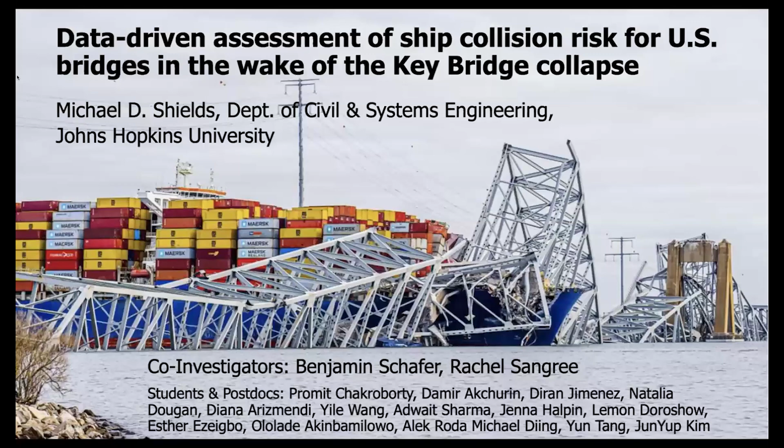But what I want to do is start by taking you back to that day. If I can get this to work, I am going to play the video. You're going to see it here, and I'm going to run through a really quick timeline of the events that transpired that night. So at 1:25 in the morning, the main electrical breaker in the MV Dali tripped. At that time, the ship was three ship lengths away from the bridge. To give you a perspective, that ship's 1,000 feet long, so it was about 2/3 of a mile away.

When it lost power, it lost the main propulsion system entirely. The propellers shut down, the rudder was immovable, and about a minute later, 1:26, the pilots called for a tug assist to come and try to gain control. That tug assist was too far away. About a minute later at 1:27, they dropped anchor to try to slow down as much as they could. And the pilot made a radio call to warn the traffic in the area.

And now here you can see we're sitting at 1:27, about halfway through, almost to 1:28. And you can still see traffic going over the bridge. You can see little cars here still passing over the bridge. At 1:27:53, so at this moment here, the MDTA closed the bridge. So the bridge closed at just before 1:28.

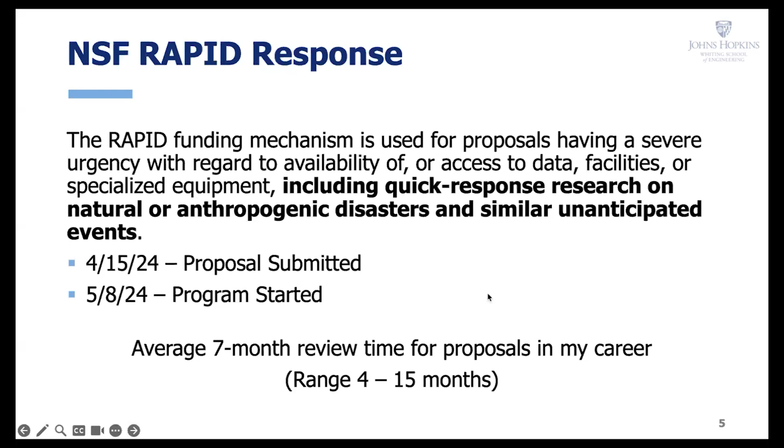Now, to give some perspective, if you're not familiar with NSF, probably many of you are, but to give you some perspective, in my career, NSF proposals, there's an average of a 7-month review time, and the range is between 4 and 15 months. So to submit a proposal and have funding within about 3 weeks is really, really fast for the National Science Foundation.

All right, so what's the basis of our study? Really what we wanted to look at was risk to bridges across the United States. So what is the risk of this specific event happening? But more broadly, what is the risk that another event like this could happen somewhere in the United States?

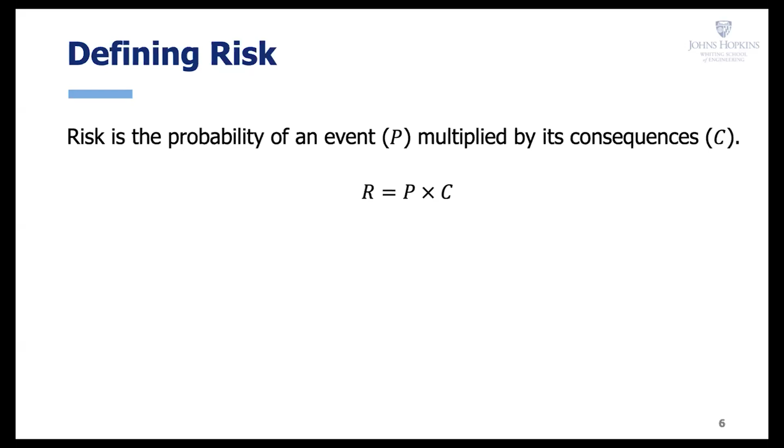So I want to start, I'm going to keep things as simple as I possibly can. I'm going to start with a really easy definition of risk, right? Risk is the probability of an event multiplied by the consequences of that event. So if we have an event that is really catastrophic, like a bridge collapse, we want the probability to be very small. Our risk tolerance is the risk that we're willing to accept. At what level of risk do we as a society, do we as individuals, are we willing to accept?

Now, the established risk tolerance for bridges in the United States is that the annual frequency of collapse due to a vessel collision for critical bridges like the Key Bridge should be 1 in 10,000, okay? So what that translates into is, you can think of that as being a collapse event every 10,000 years. You want this to be exceedingly rare, okay?

So when this occurred, and I got that email from my colleague, it really called into question, are we actually achieving this risk tolerance? And it also asks the question, if we are achieving this risk tolerance, is this risk tolerance itself adequate? Is it sufficient for what we want it to be?

So this led to 2 hypotheses that we posed in this study. The first hypothesis was that the probability of the bridge collapse was underestimated, and specifically the reason that it was underestimated is because the probability of a major collision was underestimated. And I'll get into sort of the basis for that hypothesis in a moment.

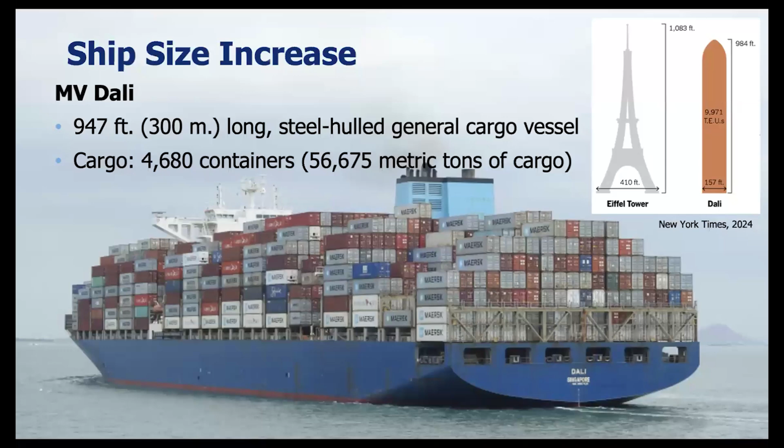So we now see about 3 times as much traffic as we did at the time that the Key Bridge was first built. The other factor is that the ship sizes have increased incredibly. The Dali, which is the ship that collided with the Key Bridge, was close to 1,000 feet long. It was a cargo vessel that held about 4,700 containers, 57,000 metric tons of cargo. To put this in perspective, that's turning the Eiffel Tower on its side, to give you a sense of scale.

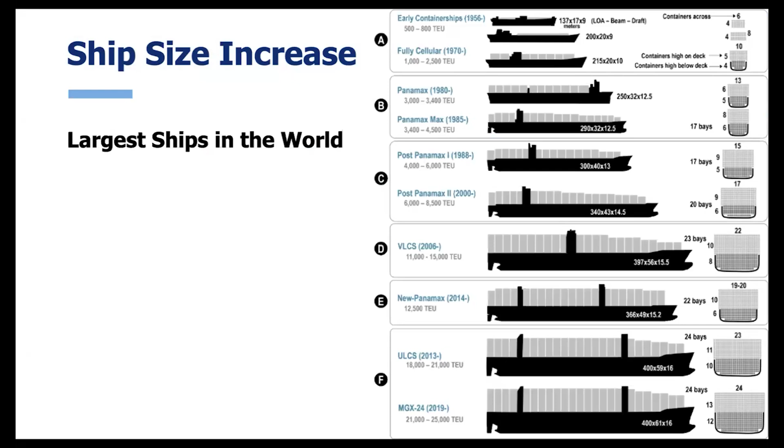And believe it or not, the Dali is a large ship, but it's not by any means the largest ship out there. So if we take a step back in time and we look at what was the largest ship at the time that the Key Bridge was built. The Key Bridge was built in 1977, and the largest ships in the world were about 3,000 TEUs. To give you some perspective, a TEU is a 20-foot equivalent unit, and there are 2 TEUs in a ship container, okay? So the largest ship in the world at the time was about 3,000 TEUs.

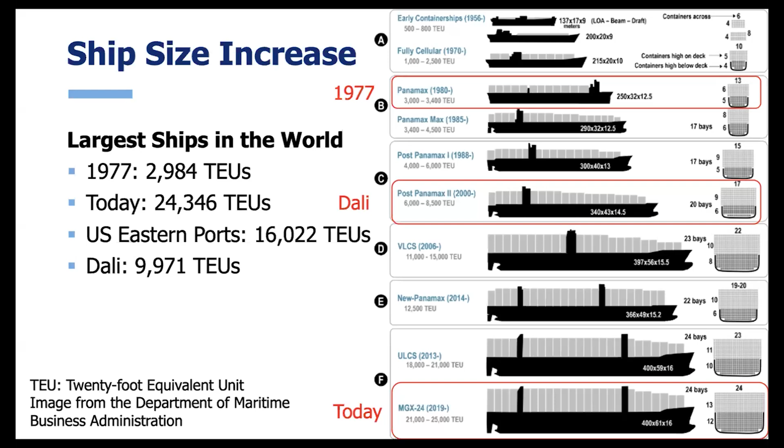Today, the largest ship is 24,000 TEUs. That's 10 times as large as the largest ship at the time the Key Bridge was built. What the ports in the eastern United States can handle are ships up to about 16,000 TEUs. The Dali itself was about 10,000 TEUs. So the Dali, like I said, was a large ship, but it was 2.5 times smaller than the largest ships out there, just to give you some perspective. So now if we think about the Dali being the Eiffel Tower, the largest ship now is the Empire State Building, okay? All right, so now we have a very, very large number of very enormous ships passing

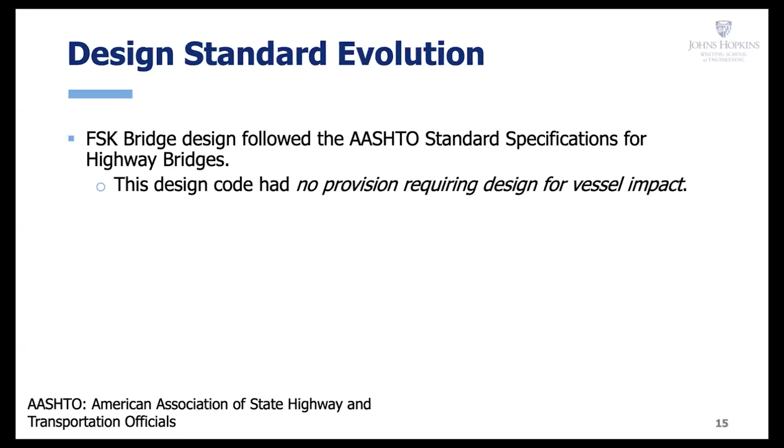through American waters. The other thing we need to look at is how the design standards have evolved over time. Okay, so here, most people are really surprised when they hear this, that when the Key Bridge was built, there was no provision in the design code that required it to account for vessel impact. That started to change in 1980 following the Sunshine Skyway Bridge collapse in Tampa, Florida. In the aftermath of that, people recognized that ships were a real threat to U.S. bridges. However, it took 14 years for the design codes to update and to require vessel collision provisions. So bridges built after 1994 now account for ship collisions, but any bridge that was built before 1994 was not required to adopt these provisions. They were not required to be retrofitted or protected from vessel collision.

So let's go back to our hypothesis. Why do we think that the probability of collision is underestimated? Well, ships are much larger. There's a lot more of them, and the design didn't account for them. So all of these factors together really led us to believe that we majorly underestimated the risk to U.S. bridges. So let's take a closer look at the current design standards. And I want to emphasize that these design standards are, again, just for bridges post 1994. So this was never applied to the Key Bridge.

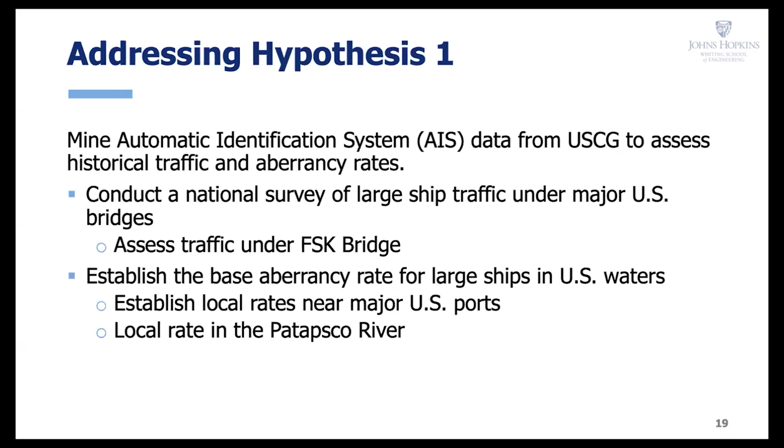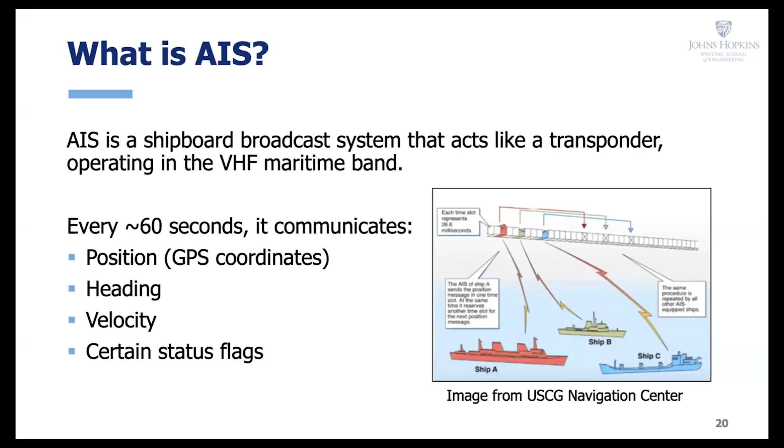And we wanted to use that data to assess historical traffic and aberrancy rates. So we conducted a national survey of large ship traffic under the major U.S. bridges, and that, of course, included the Francis Scott Key Bridge. What we're currently working on now, but is not complete yet, is establishing true aberrancy rates for large ships in U.S. waters. So again, AIS is a transponder system communicating to the U.S. Coast Guard the location of every vessel in American waters.

Now, we took that data all the way back to 2009. So we have data for every ship that has been in American waters since 2009, every minute of their travel. To give you some perspective, looking at just 2018 to present, which is what we're going to focus on, that's about 1.6 terabytes of data, or 160 million broadcast points from all vessels in U.S. waters.

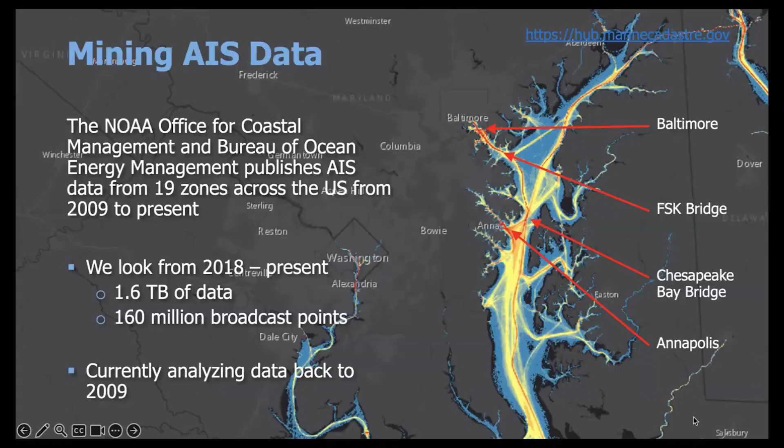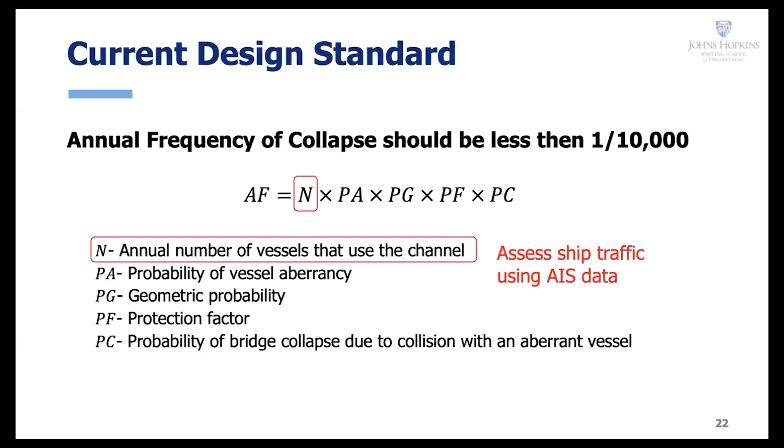Okay, so like I said, we're trying to quantify that N, right? We're trying to use the AIS data to figure out how much traffic is passing under US bridges. So the first thing we needed to do is find where these ships are going. So we identified the 49 busiest ports in the United States. These 49 ports account for just about all of the very large ship traffic. Any port that could handle ships larger than 150 meters is of interest in our study.

And here you can see a geographical layout of some of those major ports. We're looking all across the United States, East Coast to West Coast, Gulf of Mexico, New Orleans, Houston, even some up on Lake Superior in Duluth, Minnesota. So we looked at traffic coming into these ports, and we identified all of the waterways that lead up to these ports.

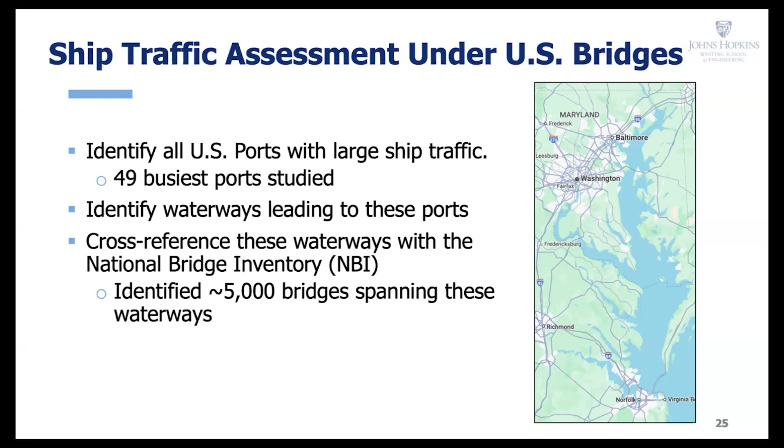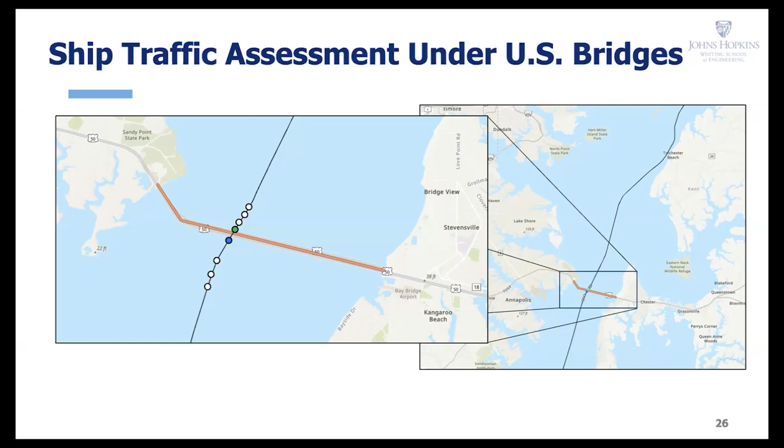And to give you a sense of how we did this, we wanted to cross-reference the AIS data that we pulled from the US Coast Guard with the data in the National Bridge Inventory. Here, I'm going to blow this up, you can see these little dots are AIS data points, and the orange stripe is a line on a map that represents the Chesapeake Bay Bridge as identified in the National Bridge Inventory. What we needed to do is identify every time one of these ship paths intersected with one of the bridges we identified. And so we systematically counted every time a large ship passed under a major bridge in the United States over the last 15 years or so.

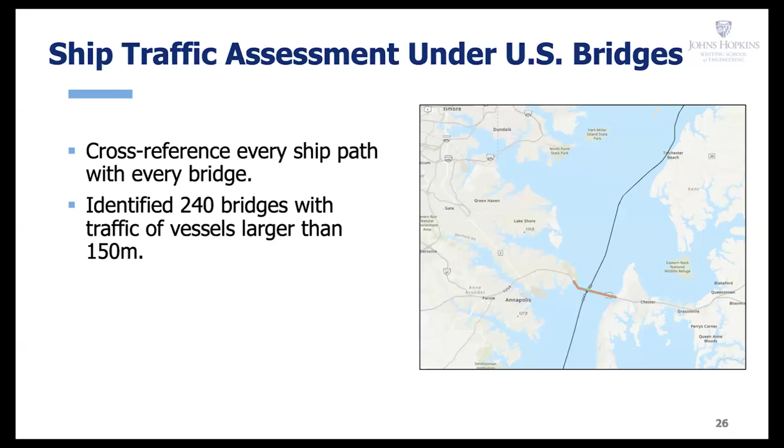From this, I mentioned we had 5,000 bridges that spanned these waterways. We identified 240 bridges that had traffic larger than 150 meters. We have since expanded that. We now have about 400 bridges in the study, and the major conclusions in terms of traffic were broken down

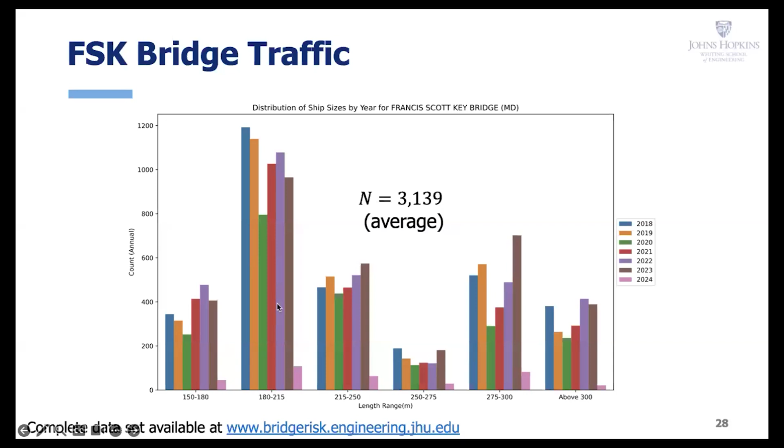So next, focus on the next two components. We know that there's now a lot of traffic. N is large. There's a lot of traffic going under these bridges. And the next components are looking at what is the probability that the vessel actually goes aberrant and then collides with the bridge. And so what we're looking at now is trying to use this AIS data to assess aberrancy.

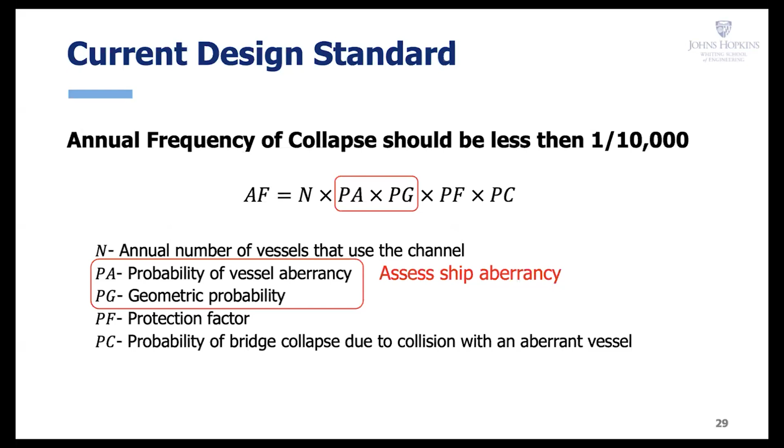What we did in our initial calculations, and that's the results that I'm going to present, because quantifying aberrancy is actually quite difficult because there are a lot of different reasons that a ship can aberrate. It could be pilot error, it could be weather, it could be a loss of propulsion event. And trying to arrive at an aberrancy rate is quite difficult, something we're still working on. But the AASHTO code, the design specification, specifies that there's a base aberrancy rate of 0.6 times 10 to the minus 4. So that gives you a sense of the rate at which the ships go aberrant.

And then it has a number of factors on it. These factors we're going to ignore for the time being. And the reason we're going to ignore them is because all they do is serve to increase this base aberrancy rate, to make these type of events seem more frequent.

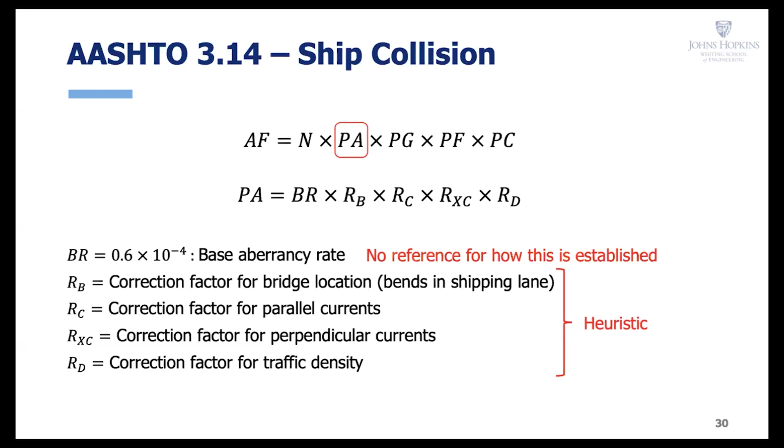Now, I want to emphasize here that there is no reference in the AASHTO code as to how this base aberrancy rate is established. So we're still looking for it. If somehow we find it, we would love to know where this comes from. These other factors are really heuristic, and that's why we're trying to quantify this aberrancy rate for ourselves rather than relying on these sort of heuristic factors.

So now, in terms of the geometric probability, let's talk about a ship that's gone aberrant. What are the chances that it's going to hit the piers of the bridge? So what the code says that we do is, and I'm going to try to explain this graphic as best as I can. If this here is the bridge pier, can you see my cursor?

Okay. If this is the bridge pier, we're going to imagine we place the ship next to it on both sides of the bridge, and we're going to take half of that and project that down onto a normal distribution, where the center of the normal distribution is the path of the ship. And we're going to assume that the aberrancy occurs according to a normal distribution. So there's a high chance that it's going to just aberrate a little bit, but there's a low chance that it might aberrate a great deal.

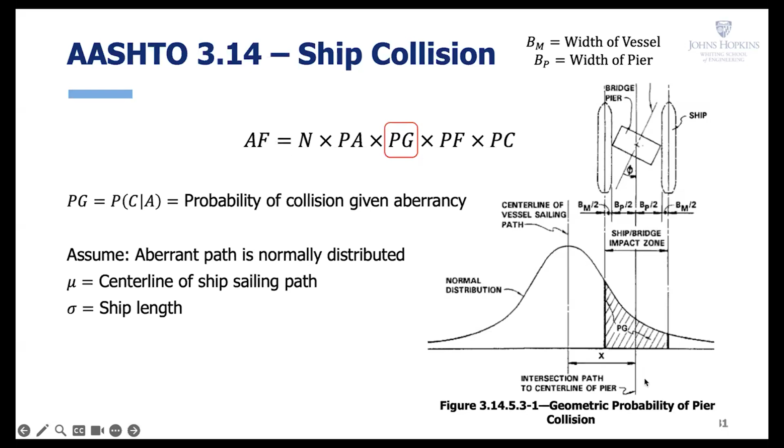And then the intersection of the projection of that down onto this normal distribution, the area under that curve, gives us the probability. And the standard deviation, I forgot to mention, of this normal distribution is equal to the length of the ship. So the longer the ship, the wider this distribution is, and the larger the chances it's going to hit the piers.

Now, there are several problems with this. First of all, the ships oftentimes are not passing right down the center of the shipping lane. If I look at the Golden Gate Bridge as an example, there are actually two dominant lanes that they pass in, and neither one of them is centered under the bridge. Both of them are actually a little bit closer to the piers than the center span.

So if the ship is actually passing somewhere much closer to one of the piers, and then it aberrates, the probability that it's going to collide with the pier is much higher. This is not accounted for in the current standards, and it's something that we're working to improve. So now if I look at the Key Bridge as an example, I'm going to run through a very quick calculation of this.

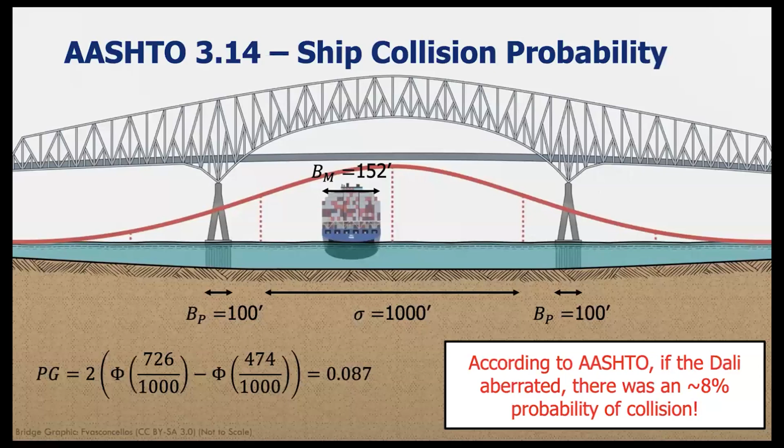So if I take this normal distribution and integrate it over the width of these piers, what I find is that there's about an 8.7% probability of collision given that the ship went aberrant. So if the Dali went off course, there was a pretty high chance. I mean, 8% is a pretty high chance that it was going to collide with the bridge. And this is, again, according to the AASHTO standards.

So if I run this out with some very simple numbers, 3,139 is the average number of ships that pass per year. 0.00006 is the base aberrancy rate. If I knock that 8% down to 5%, just to be really super conservative, and then I apply a 50% protection factor. Make no mistake, this bridge was not 50% protected. I'm using this only for demonstration purposes.

I see that the annual frequency in this case comes out to be about once every 200 years. That is much, much higher than we want it to be. And in fact, this is a simple demonstration for illustrative purposes. When we actually run these numbers based on the real traffic and the real ships that pass under there, the actual estimate for the Key Bridge was we would expect a collision once every 48 years.

Now, coincidentally, it was 46 years after the bridge's construction that it was hit.

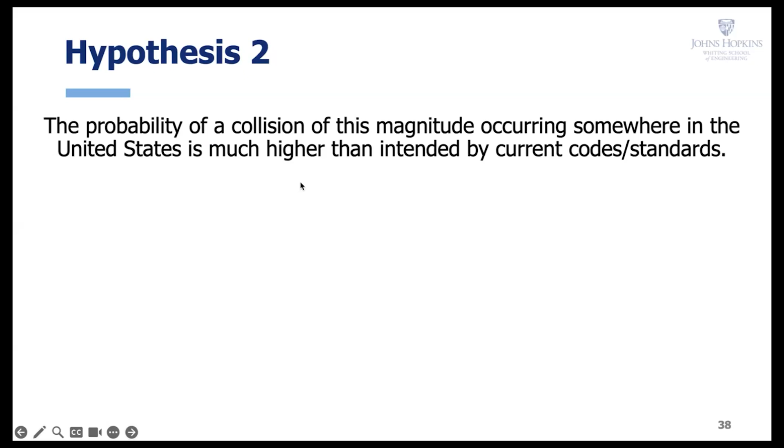Now I'm going to skip through some proposed changes in the methodology, and I'm going to end on one final thing with regards to hypothesis two. Remember that hypothesis two was saying if it didn't happen to the Key Bridge, we expected it to happen somewhere. And I want to take that initial 10,000 year return period, and I want to analyze it a little bit more carefully. So let's imagine that every bridge in the United States actually meets this standard, and that we have an annual probability of collapse of 1 in 10,000. From what we've seen, we have about 250 bridges, maybe closer to 400 bridges that see large vessel traffic.

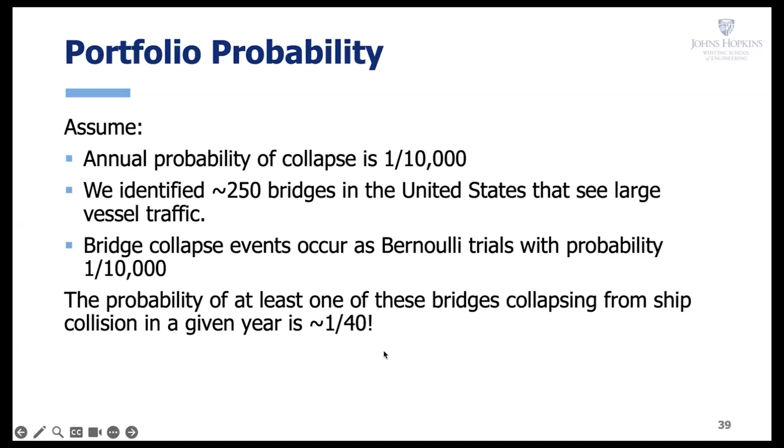If bridge collapse events occur according to Bernoulli trials, and you can think of a Bernoulli trial as a simple flip of a coin: heads it fails, tails it doesn't fail. And that coin has a 1 in 10,000 probability of failure. So 9,999 times out of 10,000, it's going to land on tails and you're going to be safe. But 1 in 10,000, it's going to land on heads and you're going to fail. If we assume that the probabilities work this way, with 250 bridges, we would expect at least one bridge collapse every 40 years. So even with the annual probability of collapse of 1 in 10,000, we're still seeing bridge collapses on the scale of decades.